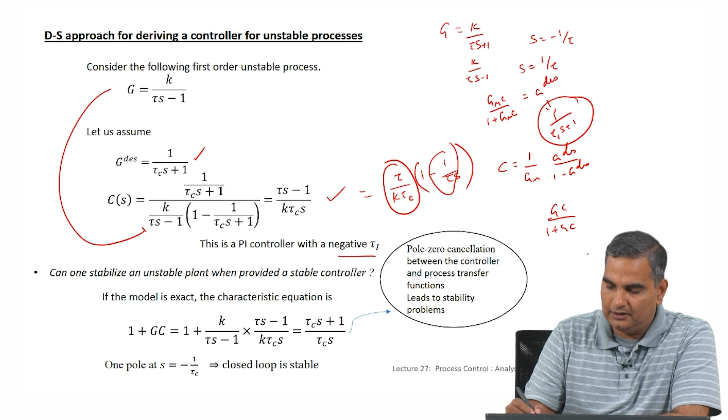The thing you also want to notice here is when we do this closed loop, GC over 1 plus GC, G is K over tau S minus 1, and C we have computed as tau S minus 1 divided by K tau C S. Divided by 1 plus G, which is again K over tau S minus 1, I have tau S minus 1 over K tau C S. So when I do this closed loop computation, it's going to turn out to be 1 over tau C S plus 1, because this is how we actually designed the controller, but nonetheless I just want you to notice something.

What we are going to do is this pole-zero cancellation in the closed loop transfer function computation. This is something we have never done before in the closed loop computation. We did do pole-zero cancellation in the controller computation before, when we talked about inverse response systems and so on, but we have never done a pole-zero cancellation during the closed loop transfer function computation. So that is another difference.

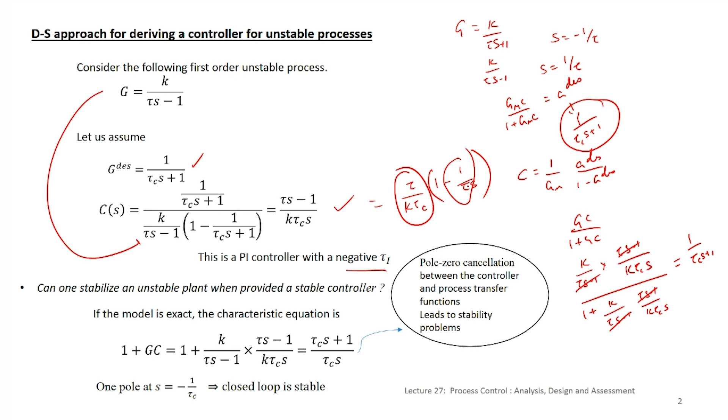So the two differences I want you to notice are: one, for the first time we are getting a negative tau I for the I part of the PI controller, and two, we are also doing a pole-zero cancellation in the closed loop transfer function computation, which we have not done before. So we want to see, because of this, are there any issues that come about when we do this controller design for unstable processes. Now you will see something interesting.

Suppose we designed a controller based on GM equal to K over tau S minus 1. Let us assume the actual process G is slightly different from this - the K is the same, but let's say the time constant is slightly different from tau, which is tau prime. Remember, when we talked about this before, I said you can design a controller based on GM, your notion of the process, and the closed loop behavior will be G desired if G equals GM.

But to really see the impact of a process which is slightly different from the model you have chosen, you should recompute GC over 1 plus GC using the actual model you think is going to be operating. So while G desired is GM times C over 1 plus GM times C, to see the real effect of plant model mismatch when computing the true closed loop transfer function, you should put G process times C over 1 plus G process times C. When this G process is slightly different from GM, we want to see what happens.

Of course, when GP is GM, GCL will be G desired. This is something we have talked about several times before. So when we do that, I take G as K over tau prime S minus 1, and let's just compute 1 plus GC and see what happens.

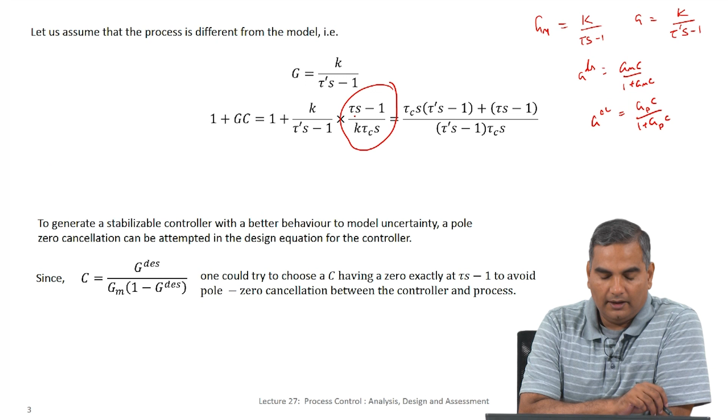So when I do 1 plus GC, I have 1 plus K over tau prime S minus 1. The controller still remains the same because it was built based on the model, which is tau S minus 1 divided by K tau C S. Now notice, in the previous case, because tau prime and tau were the same, we cancelled this in the closed loop transfer function - we got our pole-zero cancellation. But now we have assumed tau prime is slightly different from tau, so we cannot do this cancellation.

So I will get tau C S times tau prime S minus 1, plus tau S minus 1, all divided by this, and then you will have another GC. But remember, the stability of the system really depends on the zeros of this 1 plus GC, which is what we saw again in the last lecture on Nyquist stability.

So, we look at this polynomial and then say the poles of GC by 1 plus GC are going to be the roots of this polynomial, which is the zeros of the numerator of 1 plus GC. So, we will expand this and see what happens. When I expand that, then I get tau c tau prime s squared plus s into tau minus tau c minus 1.

Now, this is a positive number. This will also be a positive number because tau and tau c are in my hand, since tau is the model tau. So, as long as I choose a tau c which is smaller than tau, which is what anyway I would want, because the closed loop has to be faster, so the closed loop time constant has to be smaller than tau, this will also be positive. But whatever I do, I cannot get rid of this negative number, so this will be negative.

And if you go back to the Routh table that we talked about, remember the first step when you do this polynomial is, once you make the leading coefficient of the polynomial positive, the first level of check we do so that there is no pole in RHP is to check if every coefficient is positive. Now, this is positive, but this is negative and I can do nothing about this. So, this will have roots in the RHP. So, this is something that you cannot get rid of.

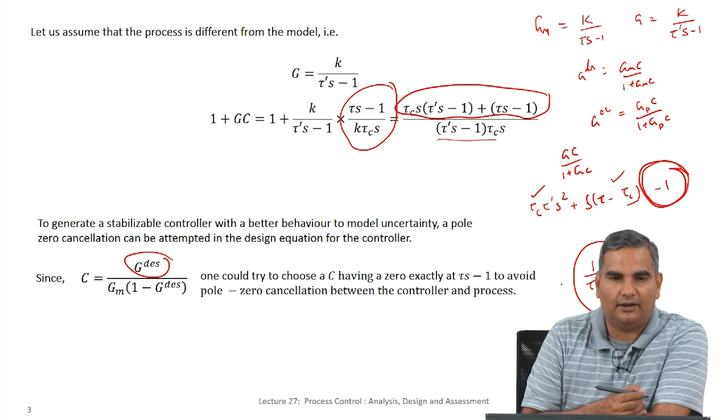So, we will see whether we can modify this G desired so that we induce a pole zero cancellation in the controller computation. So, that is the basic idea. So, the standard technique to do this would be instead of saying I will have just 1 over tau C s plus 1, what I am going to do is I am going to add another tau C s plus 1 term here, another tau C s plus 1 type of term here.

Then I have a new G desired, which is tau C1s plus 1 divided by tau C2s plus 1 times tau C3s plus 1. So, the motivation is, I have this 1 over tau Cs plus 1 term here.

I want to go away from this so that I can get a pole zero cancellation. At the same time, I do not want to go very far away from this, because this is a G desired that I like the most.

So, I want to have something very close to this, but at the same time where I have the possibility of inducing this pole zero cancellation in the controller computation. So what I am going to do is add one term here and one term, tau C3s plus 1.

Now, if you notice, if I keep tau C1 and tau C3 very close to each other, then this and this will be very close to each other, and basically you go away from this 1 over tau C s plus 1 form, but not by much, and I can control how much I go away from this form by choosing tau C1 and tau C3.

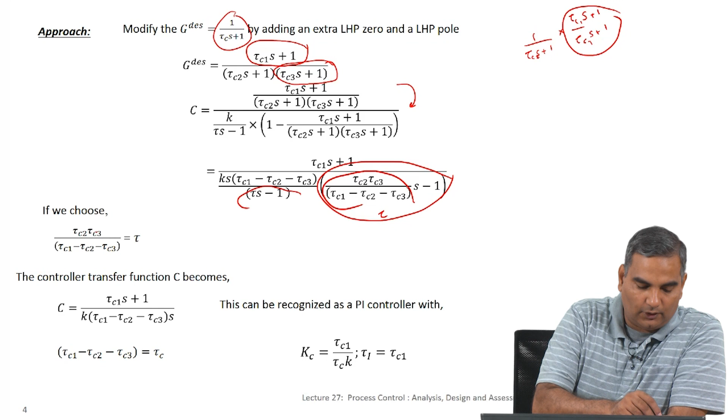So, notice how I introduce a pole zero cancellation in the controller computation. So if I set tau C2 tau C3 divided by tau C1 minus tau C2 minus tau C3 equal to tau, then I can cancel this tau s minus 1 and this tau s minus 1.

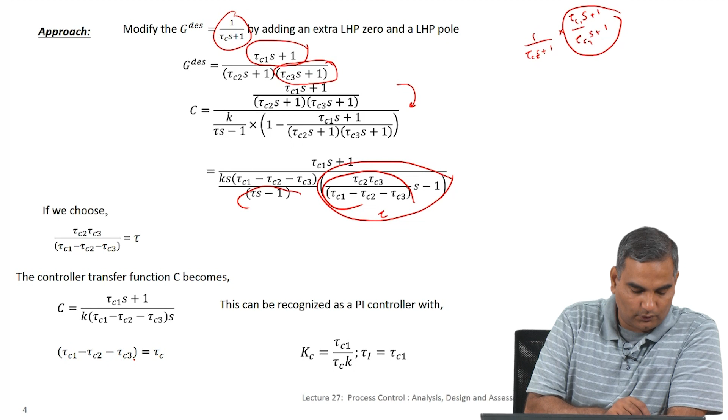And what I will be left with for the controller will be tau C1s plus 1 divided by k times tau C1 minus tau C2 minus tau C3, s. Now just for convenience, if I write tau C1 minus tau C2 minus tau C3 as tau C, a new definition of a variable, then the controller becomes tau C1s divided by k

plus 1 divided by k tau Cs. Okay, and you will again quickly recognize this is the PI controller.

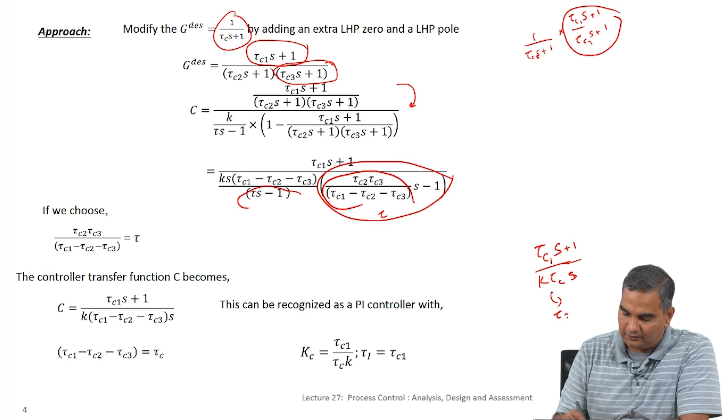So, this is the same trick that we have been using for a while now. This can be written as tau C1 divided by k tau C, into 1 plus 1 by tau C1s. So this tau C1 by k tau C is the gain of the PI controller, and this is the integral time constant of the PI controller.

So what happens now is remarkably, when we temper our expectations for G desired by going away from what we would like to have, which is this form of 1 over tau Cs plus 1, by adding a pole and a zero to the G desired, as I said before, you can control how far away from this G desired you are by manipulating the tau C1 and tau C3 values.

But basically we introduce this, and then once we put this into the controller computation, we get another choice where I can set tau C2 tau C3 divided by tau C1 minus tau C2 minus tau C3 equal to tau, which induces a pole-zero cancellation in the controller computation, leading to a PI controller for an unstable system. This is a very interesting idea now.

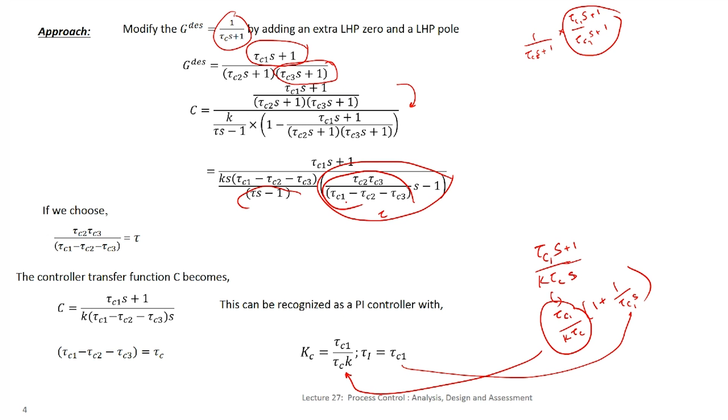See the difference between this and the previous case. In the previous case there is no pole-zero cancellation in the controller computation. Now that we have done this, for all this effort that we have taken, we want to know whether we get any purchase out of it. What that basically means is, because of doing this, has my controller become robust? That is the question we are going to ask.

To answer that question, we take a process which is different from the model that we have used, which is k over tau prime s minus 1, the same thing we did in the previous analysis that I showed you. Now I do 1 plus GC, I have 1 plus k over tau prime s minus 1, and this becomes the controller. This controller in the previous case had a zero in the right half plane, which was tau s minus 1. Because I have cancelled this out, this controller is a simple PI controller that I have here.

And now if you do the manipulation, you will get a closed loop transfer function of this form, which is given here after all the manipulation is done. So you can follow through these equations and derive this closed loop transfer function.

Now when you derive this closed loop transfer function, notice the denominator has this as a positive number, because tau prime is the true process time constant, and that is a positive number the way we have defined this. Tau c is my choice, and I choose that to be positive. Tau c1, tau c2 also are my choice, so these are also positive numbers, and you can show that this is going to lead to a stable closed loop.

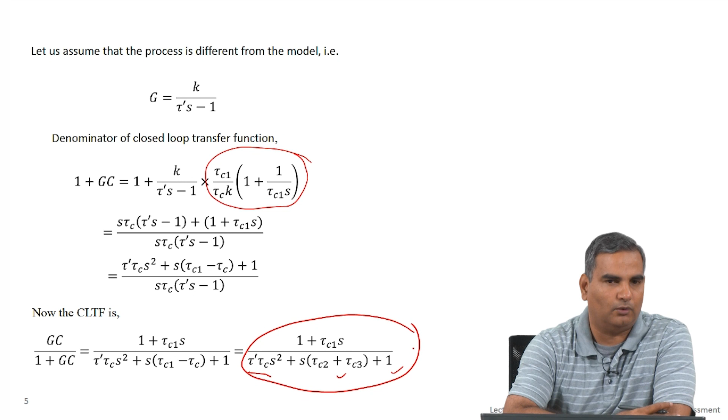The only thing is the PI controller is designed in such a way that the G desired, if the process and model are the same, is not going to be a very simple 1 over tau Cs plus 1, but on top of it there is a zero and pole that have been added. So in some sense we have gotten a robust controller by giving up on the performance that we expect.

Now let us do some kind of sanity checks on all of this. So the kind of things I am going to do is, if this tau prime is actually equal to tau, I am going to see whether — just to make sure I have not made any mistakes here — I want to show you how you can do some of the sanity checks.

So you would expect if tau prime is equal to tau, then you would expect to get the G desired that we actually used to compute the C. That is one thing we can look at, and then we can also look at whether I can do some tricks to still get whatever I want, and I will show you why all of that will create problems, and so on, in the next slide.

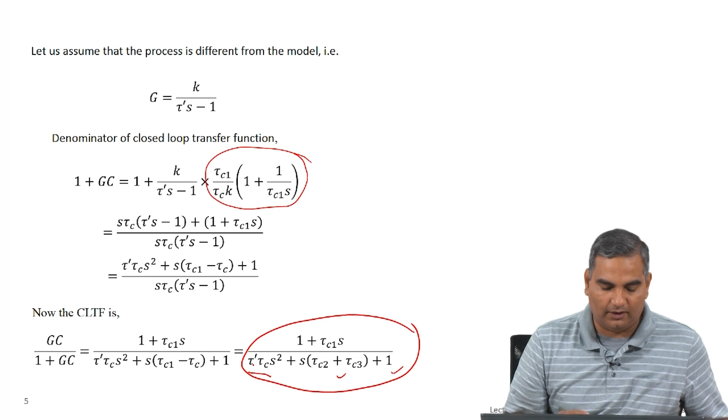So if you look at this, the G desired is the following, with the definition tau is tau c2 tau c3 divided by tau c1 minus tau c2 minus tau c3, and this is tau c, and GC by 1 plus GC, assuming the process is slightly different from the model, is this equation. Now just for curiosity, if you put that there is no plant-model mismatch and say tau is tau prime, then you will see that tau is tau c2 tau c3, so tau is tau c2 tau c3 by tau c, because this is the definition here.

So if tau prime is tau, then take the denominator of this, tau prime is tau. So tau prime is going to be tau C2 tau C3 by tau C, times tau C S squared plus S into tau C2 plus tau C3 plus 1. So this and this will get cancelled. Now you can write this as tau C2 S plus 1 times tau C3 S plus 1.

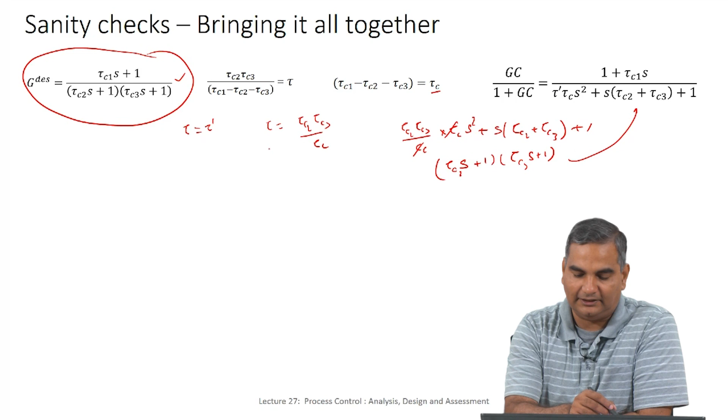So that is what will go here, which will be your G desired. So if this tau prime is exactly tau, then we get the G desired that we started working with. Now, if tau prime is different from tau, then you do not actually get this G desired, you get something slightly different from it.

So everything seems to work out nicely here. Now, if you said, oh well, now that I have this and I seem to have a stable controller, maybe I go back and think about this a little, and say, well, if I want my G desired to be of the form 1 over tau C S plus 1...

...maybe what I can actually do, now that I have done this, is see what happens if I actually set tau C1 equal to tau C3. If that happens, I will cancel this and this, and then it looks like everything is great, because I get my transfer function in the form 1 over tau C2 S plus 1, which is the best possible that I have been wanting, and still the closed loop is all okay and so on.

So you will quickly notice, if you do this with tau C1 equal to tau C3, that tau C will become minus tau C2. And once you have tau C as minus tau C2, you will have a negative coefficient here, which will make your system not robust if tau prime is not equal to tau.

So if tau prime is not equal to tau, you have to retain this term as the same term. Now, if I set tau C1 equal to tau C3 to make sure I get only a form of 1 over tau C S plus 1, then from this equation tau C1 and tau C3 will get cancelled. Now tau C will become minus tau C2, and you will have minus tau C2 tau prime S squared plus S into tau C2 plus tau C3 plus 1.

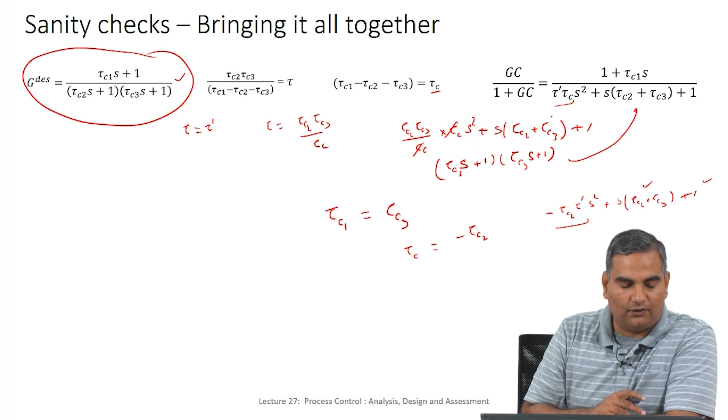So at this point we can summarize the three different things we have learned in controlling difficult to control systems. We started with inverse response. I described inverse response as systems where the initial direction of change is different from the final value, and I gave you examples showing why these are difficult systems to control.

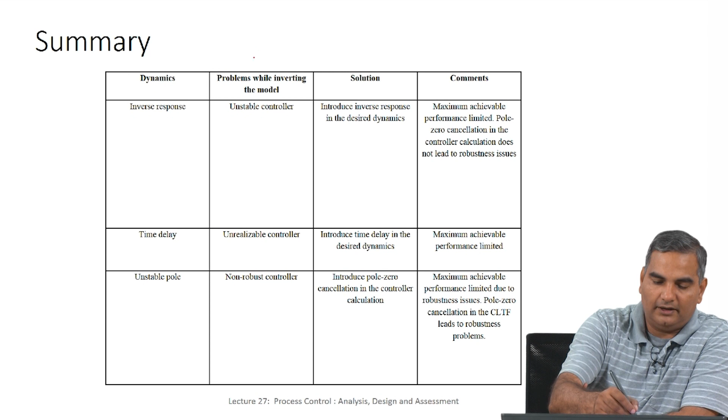And the problem while inverting the model is related to the controller, because the controller is 1 over Gm, G desired by 1 minus G desired. So the inversion comes in the controller computation. So if I have inverse dynamics, then I have an unstable controller.

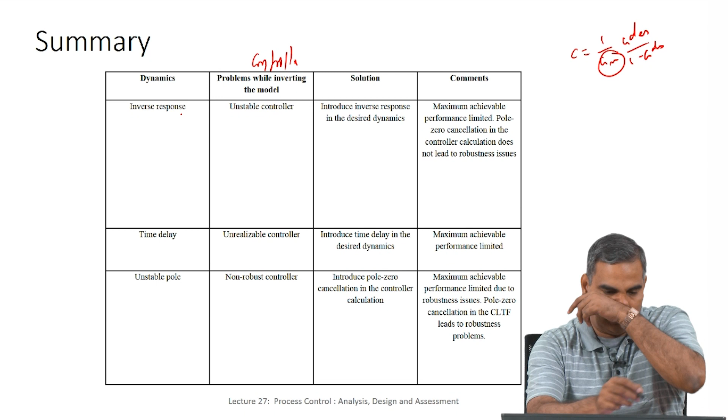So the solution we saw was to introduce inverse response in the desired G dynamics itself, that is, include an inverse response term for G desired. Then what happens is I have a pole-zero cancellation in the controller computation, and the comment is we are forced to introduce this inverse response in the desired dynamics. So basically the maximum achievable performance that we can get out of these systems becomes limited.

The other comment is that the pole-zero cancellation in the controller calculation does not lead to robustness issues. We showed that even if the zero of the process transfer function is quite different from the model, we still do not see robustness problems in the particular example I showed you. So this is as far as inverse response is concerned. Then we went to time delay.

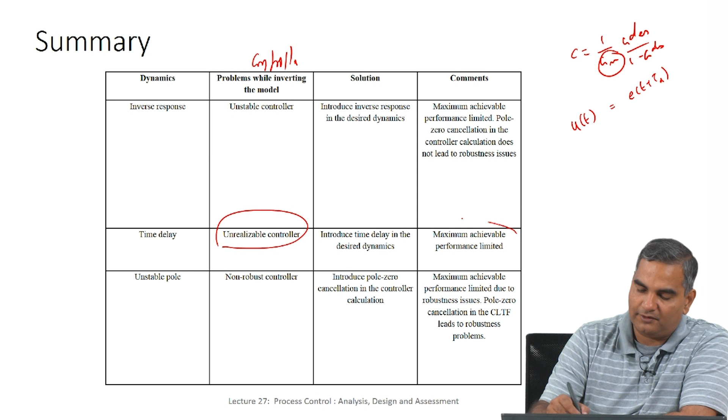If you use whatever G desired you want with the time delay system, I showed you that you will get an unrealizable controller. This means if you wanted to find the u(t) from the controller, it would require error at t plus tau d, that is future errors, which is not feasible. So you end up with an unrealizable controller. The solution is to temper our expectations for G desired by actually introducing time delay in the G desired dynamics, in which case the maximum achievable performance is limited, because things have to happen with the delay, and there is no way of getting around it.

The other comment is that the stability study requires newer ideas, and that is where we came up with the Nyquist plot for understanding the stability of the systems, which involves quite a bit of complex mathematics, but we finally reduced it to simply looking at some plots to understand what happens.

The last difficult dynamics we talked about was unstable systems or unstable poles. We talked about a system with one unstable pole. You can expand this to have more unstable poles, and how you describe those and so on. While you inverted this, it did not seem like a problem, it just looked like you got a negative tau I for a PI controller, but other than that the first look did not seem to have any problems. But I showed in the closed loop, if the process is even slightly different from the model, then you get controllers which are not at all robust.

It means if the process is slightly different from the model, you get an unstable controller. So learning from here, where pole-zero cancellation in the controller does not lead to robustness problems, whereas here we saw this robustness problem came because I am doing pole-zero cancellation in the closed loop transfer function computation. So we said let us move the pole-zero cancellation from the closed loop computation to the controller computation. This basically means I cannot use any G desired - this is where the performance limitation comes. I have to temper my G desired with more terms, which I did, and then we saw that we got a PI controller, and in the closed loop, even with process model mismatch, we can get a robust controller, which was not possible without this.